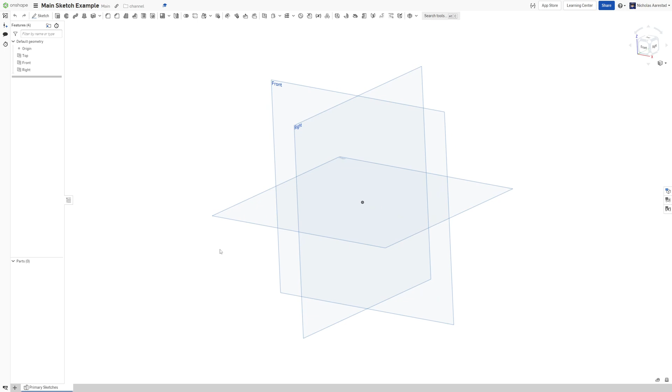So let's start out. You'll notice I'm starting with this document, main sketch example, and we're just going to start with sketches. Nothing too whack about that. We're going to be doing something a little bit careful - you might have seen this in other videos - but what we're going to do is design the entire robot in sketches, then use those sketches to create our various sub-assemblies.

So we're going to start with the side profile, for a very important reason. You kind of end up with two key profiles for a drivetrain - the side and the top. They're both important, but we'll start with the side because that'll define this distance of how far we are off the ground.

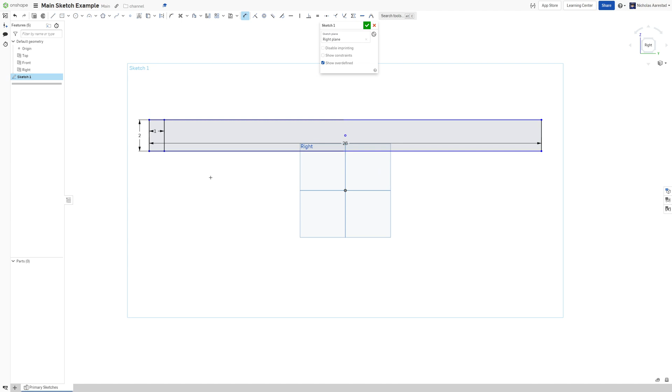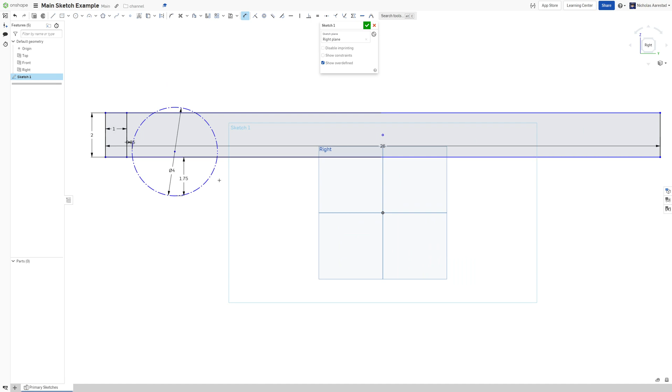This year we're designing using Swerve Drive Specialties modules, and I happen to know that this distance is about 1.75 for these, and then we end up about a quarter inch from the edge. This isn't exactly right, but it's good enough for our purposes here, and it's approximately what will line up with a CAD model for those things.

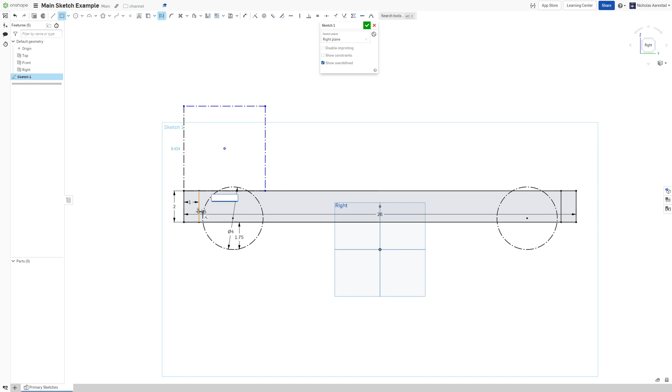So we're going to do a little bit of mirroring here, and then we're going to add just a box up here. This box, well, we'll play with it a little bit - if I remember correctly, it's something like this, but the goal of this is to reserve the space for the swerve modules.

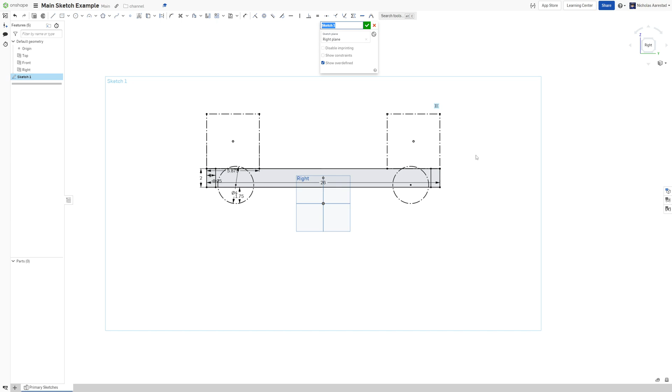I'll leave it like this, just as a reference. We'll go back and change that once we're through there. So we'll name that the drivetrain side, and that's cool.

We have a few other things we're going to want to do here. From there, we'll go and define a plane that's defined by the midplane of this, and that'll let us use this at exactly the level that it needs to be used.

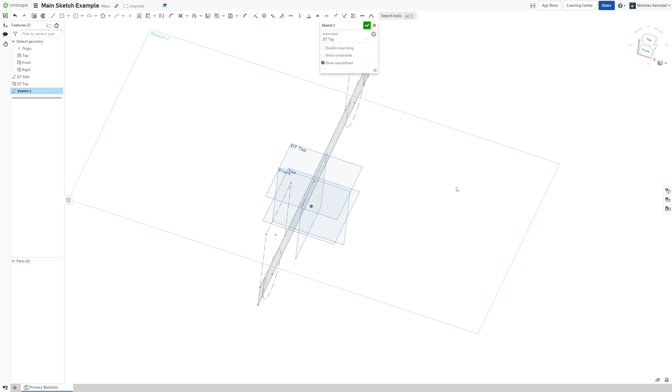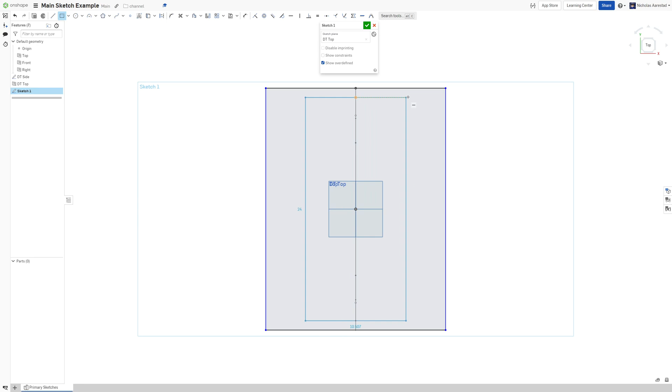And then we're going to use a few tools to make sure that this all lines up. So we're going to want each of those end bits, and then we know that we want to be something like this. Those were already constrained, of course they were. Okay, we're going to be 24 inches wide, and we already defined that it's 26 inches long.

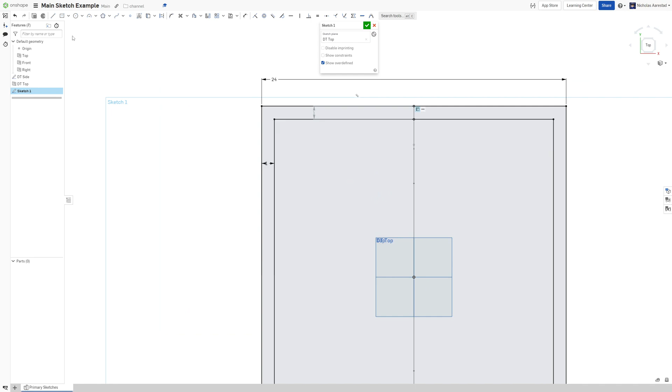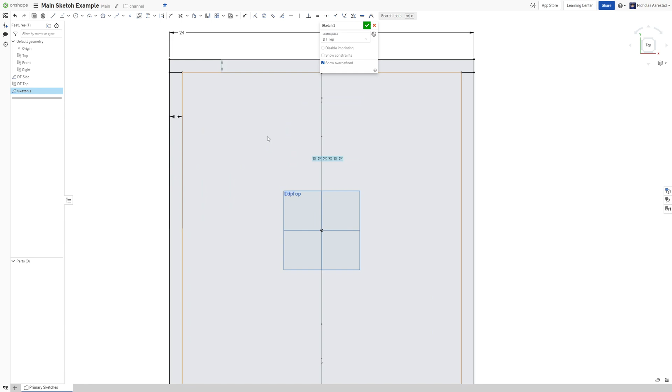One of the bits we'll need to do here is cut these off. You can also do this with just making another rectangle - I like to do it like this just for personal preference. So this is kind of the core.

So that's going to be the drivetrain top, and I'm going to leave this one like this. We're actually going to do another sketch that's basically going to be the drivetrain cross members - these are kind of important. And then it's going to be like 10 inches, which I think these 5 inches there, which is what we want. Cool.

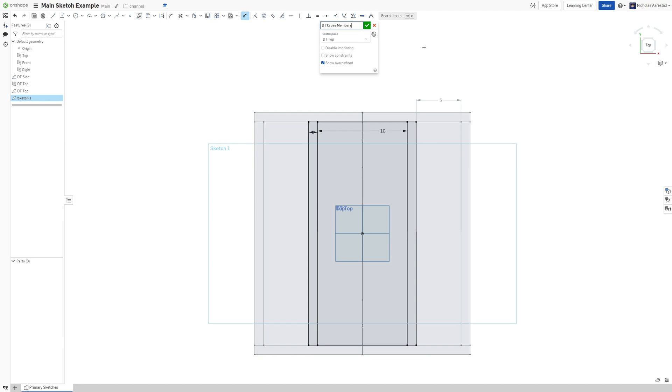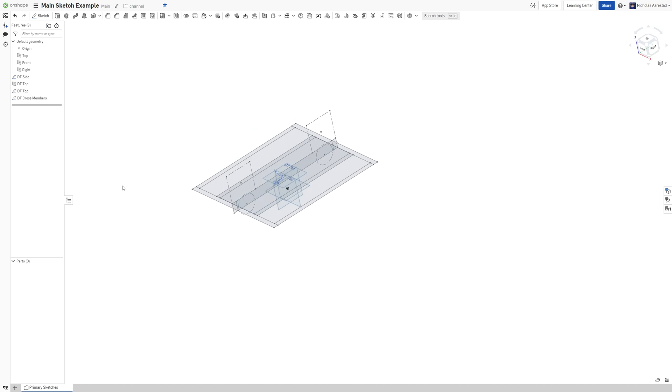So I'm splitting this up into a whole bunch of different sketches for a few reasons. The more granular this is, the easier it is to change one thing without breaking everything else. Also, it's easier to cascade failures, but if you're careful about how you're referencing these things, you can avoid that. So we're going to create a folder - it's going to be Drivetrain - and we'll really quick design that.

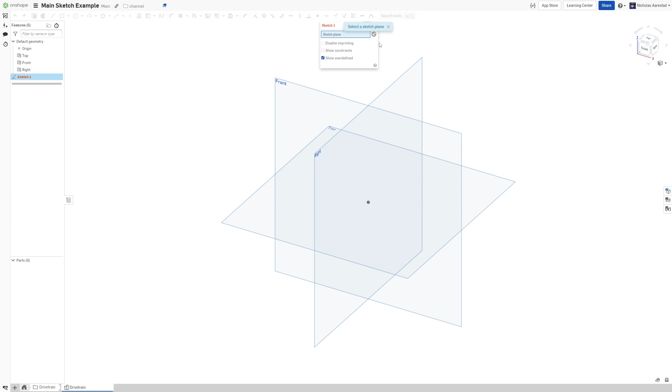All right, so I'm not going to actually go immediately into a sketch. I just did that kind of instinctively, but we're not going to do that. What we're going to do is derive.

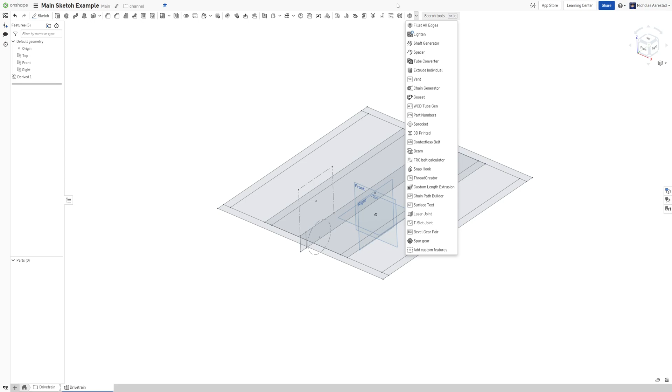All of these sketches. The nice bit about doing it like this is that now we can just extrude individually all of these. If you haven't seen the extrude individual feature script, that's Julia's feature script.

I'll throw it in the link for the video, hopefully you'll find that useful. So this is right. We've got this, this is kind of the body of each of those, which is cool.

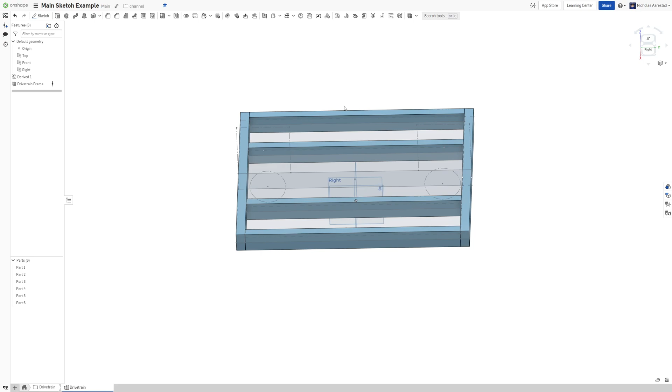We're going to need to do a few things before we go on. One of those is that the way 2220 wires our robot, you'll see this when I pull it in, we have a control board that's in here, and we like to run things through the tubes. So what I'll do is throw in some holes here that can represent those.

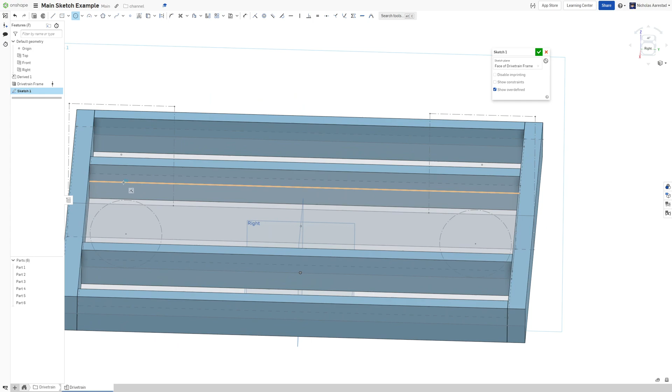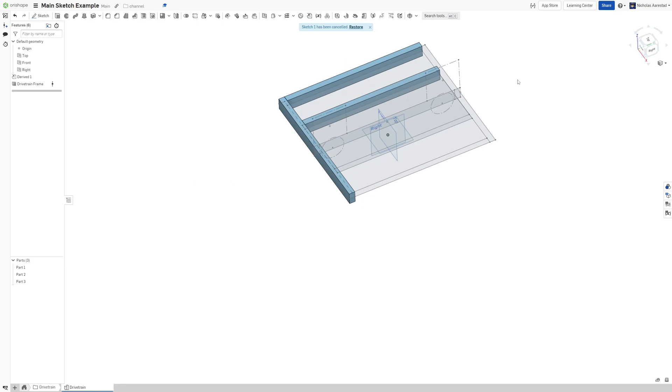These are going to be 1.5-inch holes. Actually, I just realized I messed this up, so instead of doing all of these at once, what we'll do is half of it, and then mirror everything. By doing that, we make it easier for ourselves because we don't have to replicate the features everywhere.

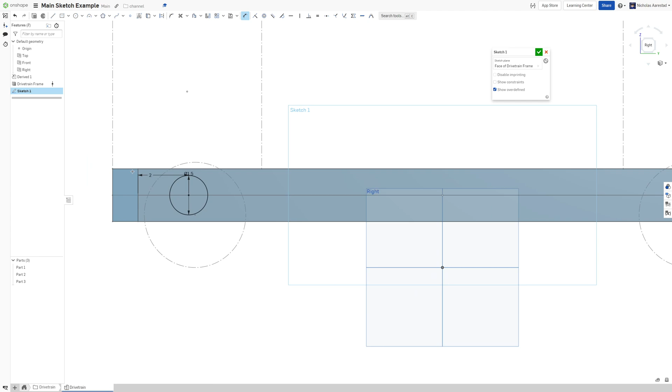We'll get back into that. The exact position of these, since we haven't fixed down a lot of things about the design, isn't super important, though it obviously will matter more later. So I'm going to offset those by about 2 inches. The goal is to leave a little bit of space here for tube plugs that go in there, and those aren't going to be totally unpatterned, but that's all right.

Just take those, and those are going to be half depth, because we're going to have a swerve module right here, so we don't want to wire directly through that. That would be a little bit of a pain.

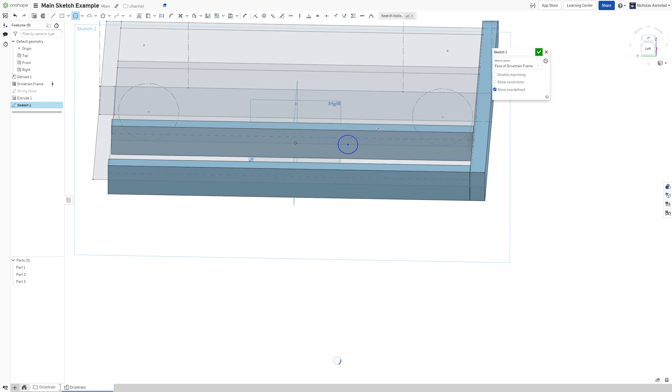So instead of doing that, what we'll do is throw them kind of in the middle-ish. Just put those like 7 inches in. We'll probably come back and visit these later.

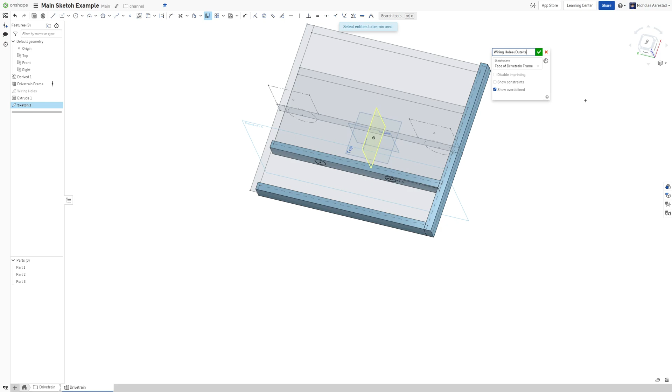All right, half-inch, and they're not going to be all the way through either. So we've got those.

I'm going to go through and name all these features.

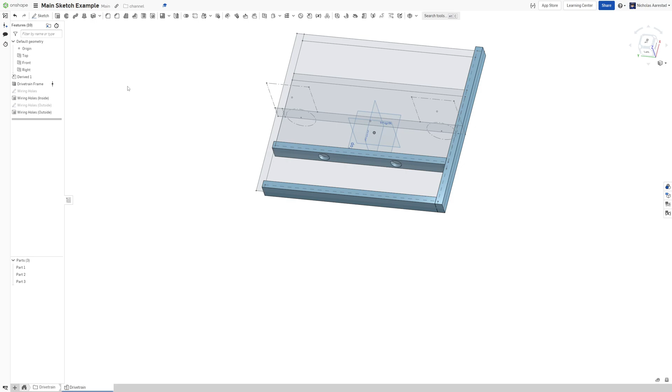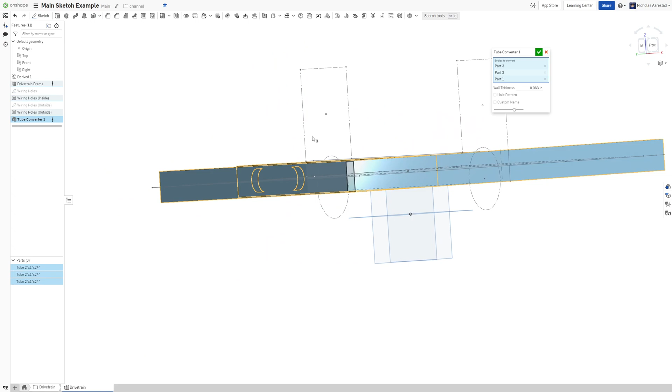And that'll look something like that. I might increase that margin offset because I don't like having holes that close. So you can tell I haven't built this exact part before, because I don't know exactly what the... oh wait a minute, I'm doing the wrong thing, aren't I? This is what we actually wanted. It's the hole margin—margin offset is offset from the end, margin is the margin around the holes. Usually it isn't more than 1/16 of an inch for something that close.

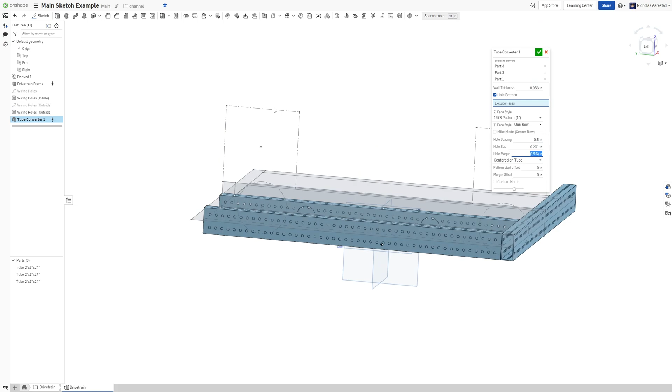There you go, so you can see those holes kind of just disappeared, which is what we want to see. I'll just leave that as a tube converter.

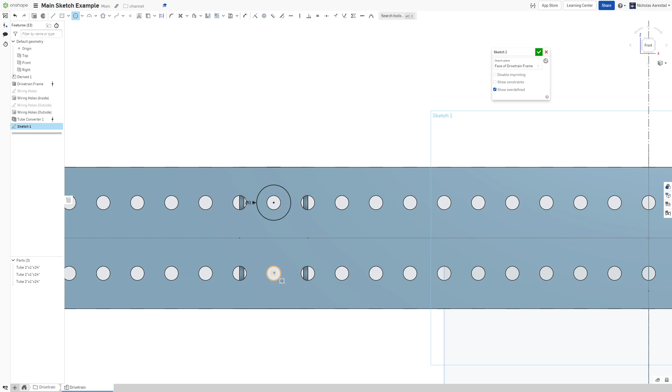We're probably going to have a few other things we want to do here. One of those is we'll want some holes here. We can just make those nice and big. Technically a socket clearance is way less than half an inch, but I just like to make it half an inch, and then it's a little bit easier to get at things. So we've got those.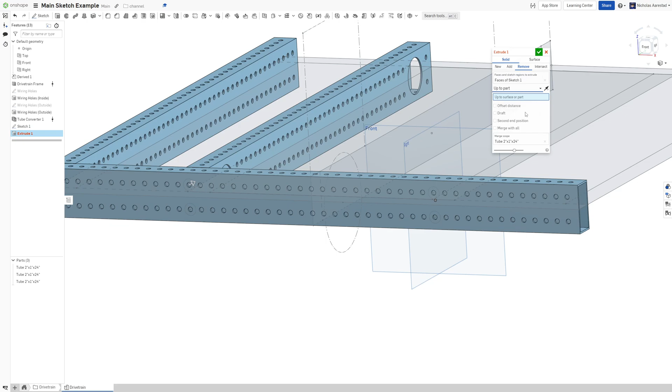Okay, up the face. There you go. Clearance, so it's not clearance holes. There we go.

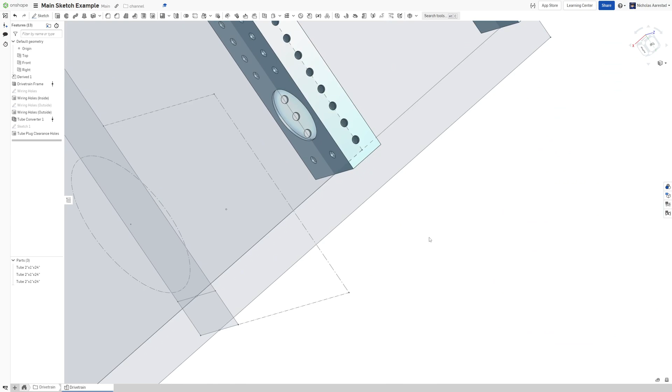All right, so we've got these kind of center rails, and some end rails. I don't have an extra hole in here—you could technically do a middle hole, the West Coast Products tube plugs we used for this do, but we're not going to. So that's kind of the core things with the tubes. We might also add some other clearance holes later, but we won't worry about those right now.

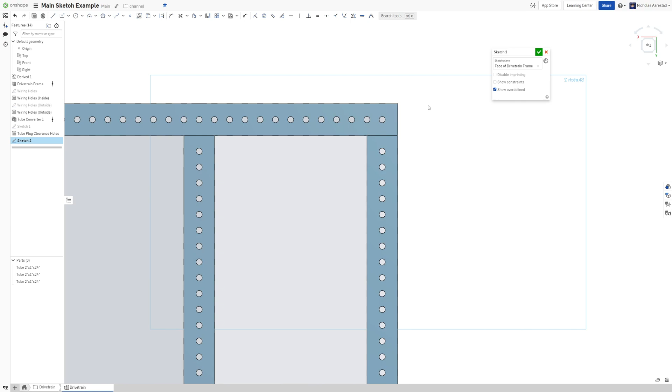So one of the next bits that we want—sorry, I'm flipping around—is going to be like this.

I do them like this because I like to have a little bit of an offset from the edge. Having an offset from the edge kind of saves you from some mistakes that you can end up with.

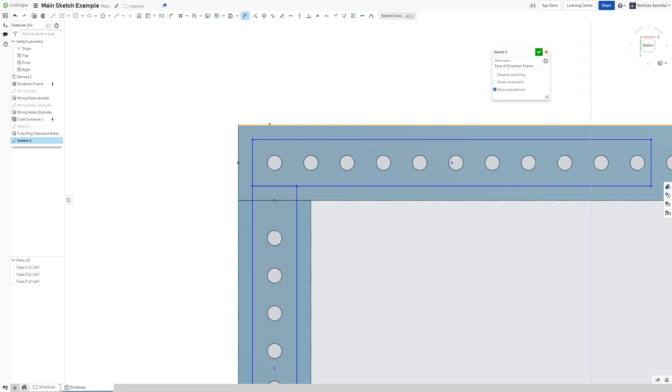If I remember correctly, the swerve drive system modules start their first hole at the fifth one in, so this guy. But that's not 100% relevant right now. So it's the fifth one, and then it's basically every inch. So 1, 2, 3, 4, like that.

So what we'll actually do here is, this can't just be construction. We're just going to use a whole bunch of these to make the initial one, all the ones we think we're going to need.

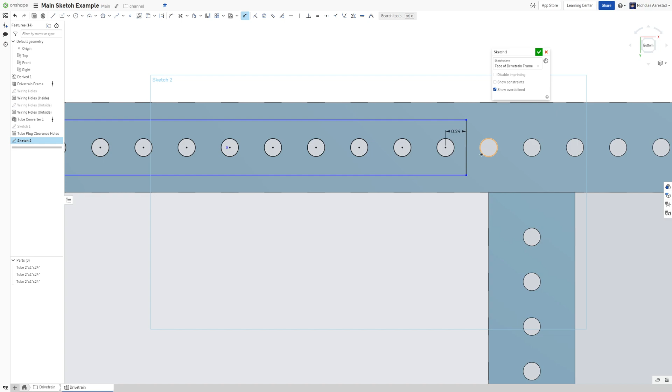I like to go 0.24. That means that if I do 0.24 on each side, I have a nice little itty bitty gap there that makes all the clearances work out. And this will be just a little bit from the edge.

Okay, and we can see that we're kind of doing the same thing down here. You see that we're pretty close to the same. So that one's actually probably the right hole here.

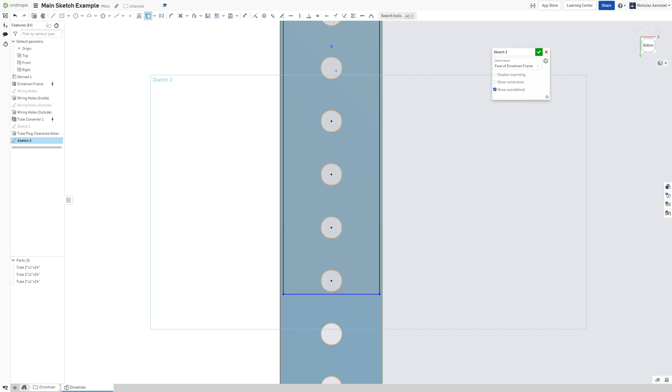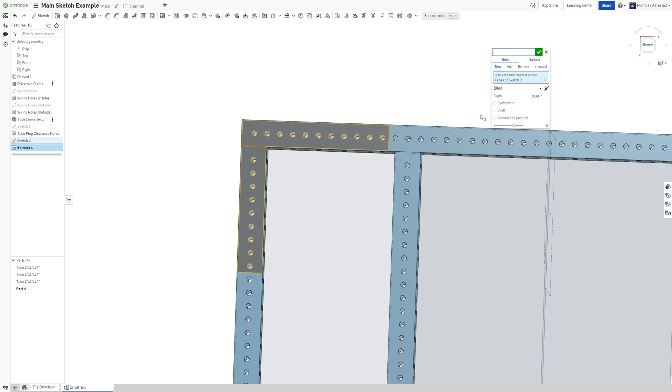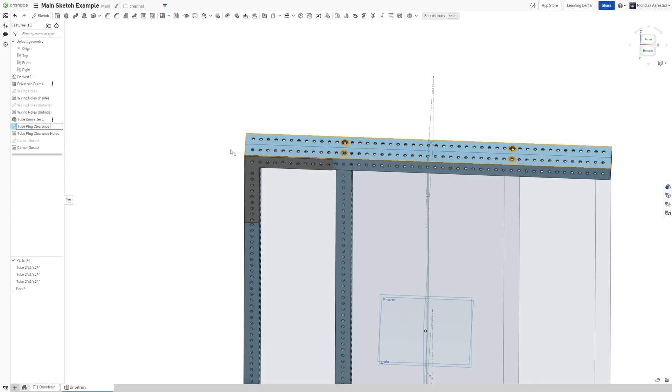We'll rename some of these guys. It's always good to name things as you go. Helps make sure you can view things later, remember what they are. If these were more than like two, and even if this got larger, I would probably group these up into folders just to shrink it down. But they're not, so I'm not going to do that.

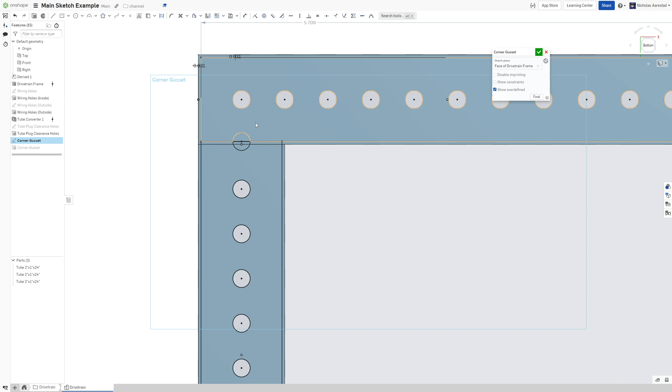I just realized I should probably also have one of these guys right here. The reason for that one is that it makes this symmetric. That will make this a symmetric part, which is very nice. Oh, that was the wrong one.

There we go. All right, so we've got those. So then the big deal is, this could be fine. This would be a fine part if we were going to stick a bolt all the way through it with the 10-32s. But for us, what we actually want to do is use a shorter bolt.

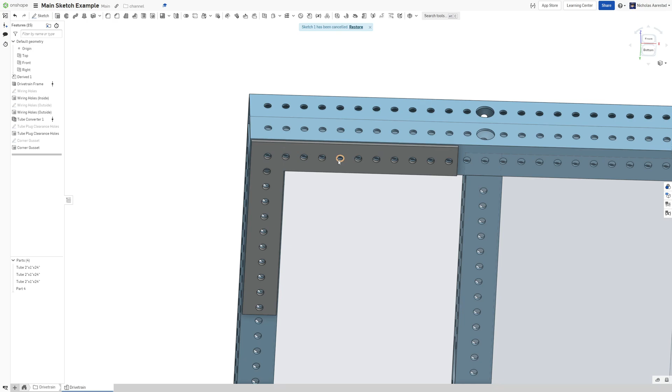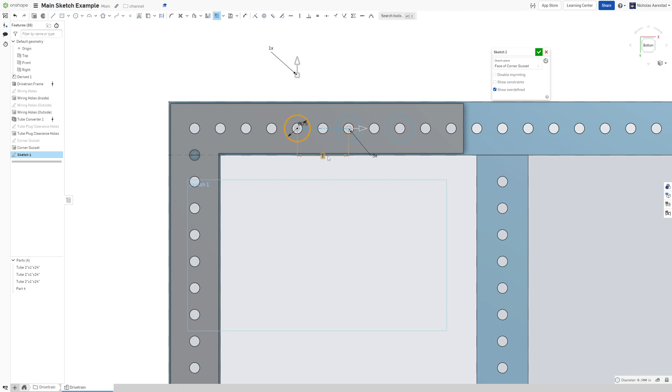So we'll do that. I think it's 1, 2, 3, 4, 5. And this will be a 0.5 inch. And then what I'm going to do is I'm going to do it like this. The reason I'm going to do it like this is because doing it with a pattern like this will make it easier to change if I want to make this a little bit different later.

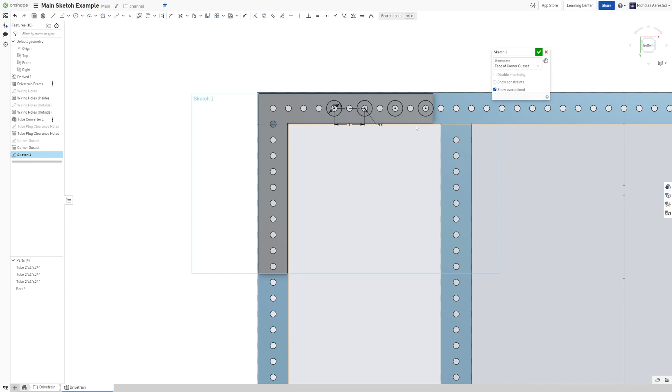You notice this guy kind of hangs off the side. That's not ideal, but we'll live with it. We'd probably want to trim that off, and we probably will. So we got that side, and then the other bit that we'll do here is

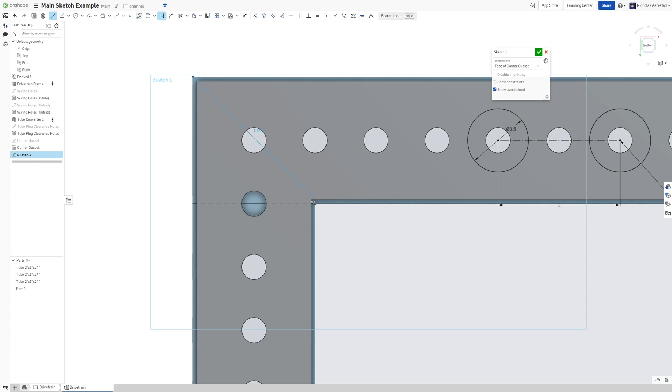we'll create a little line here and use that to mirror across, because these are going to be symmetric across that. And you can see that now we end up with basically the same thing here.

I'm going to go into an extrude, and we're going to remove. We also want to remove from both of these. You'll notice that right now it's just doing this corner. What we'll also do is mirror these across to make sure that they're all good, make sure that we're fine on all sides.

So we're going to go up to that face, and now you can see we've got some nice clearance holes.

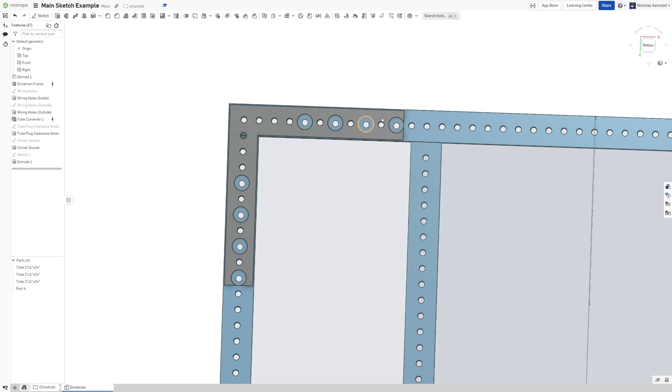Yeah, so our other option is that these don't need to be half an inch. If they were something closer to what's actually recommended, which is like 3/8 of an inch, we end up with that. And in fact, I'm probably going to do that just because that's a little bit nicer.

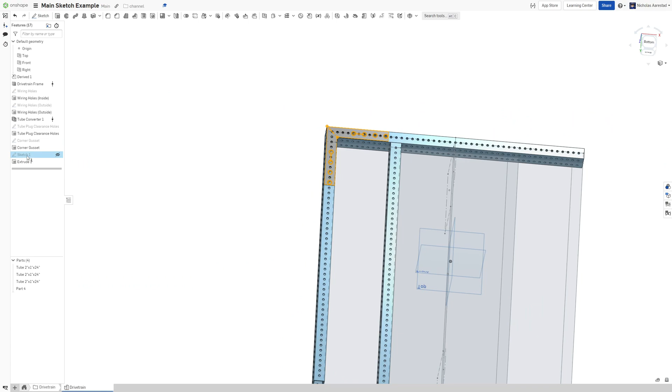And then we're going to do our mirrors. So mirror those across, and you see that now we get those down here.

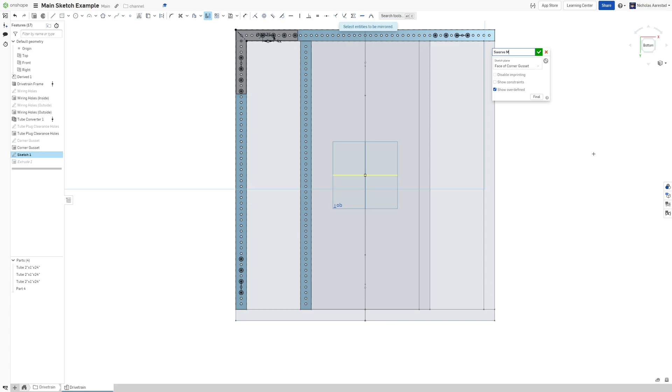Mirror them down here. Then we'll name these clearance.

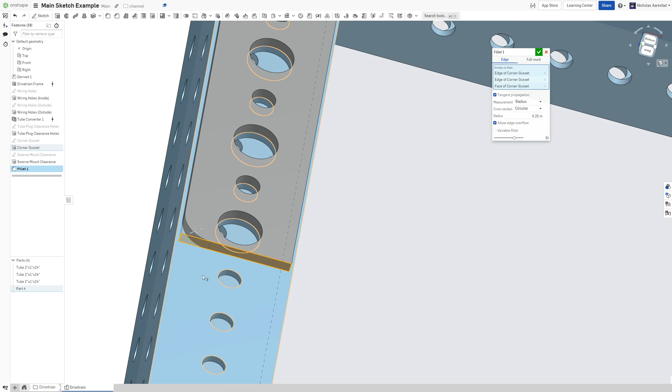Right, and for our final bits, we're just going to round everything off—not the entire corner, that would be bad. I'm just going to do those outside ones because I want to do something a bit larger on this inside, something more like maybe a 1.5 inch, just to give it that little bit of extra strength down there.

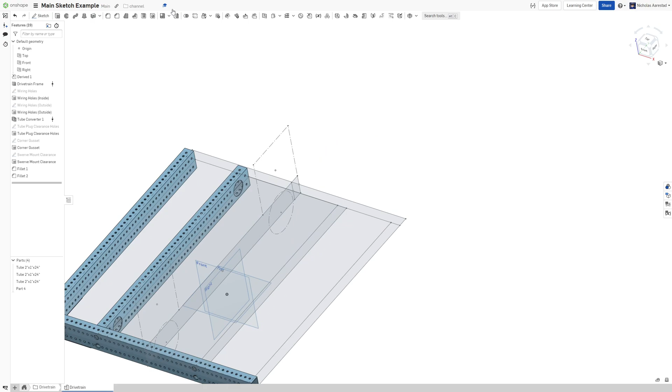All right, so we've got that done, which means all that's really left to do is mirror this around. My philosophy has changed a little bit since the last time we talked, and honestly, I just like mirroring things now. I like not having to do very much assembly at all.

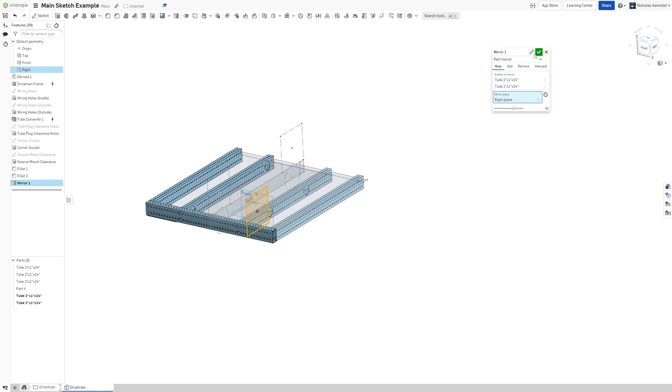So we're going to mirror these across, make sure that they're new, and then we're going to mirror this guy to the back. And now we have all of our different parts. This is the bottom gusset.

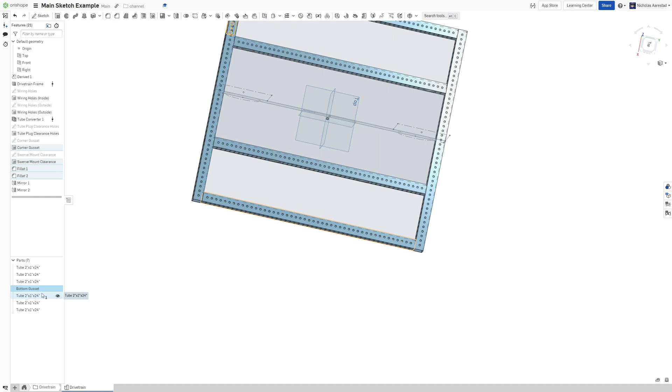All right, so we could technically mirror this guy too, but it's a little bit less painful to just use that one, so I'm not going to. We're going to assemble the drivetrain, and then that'll be it for this video.

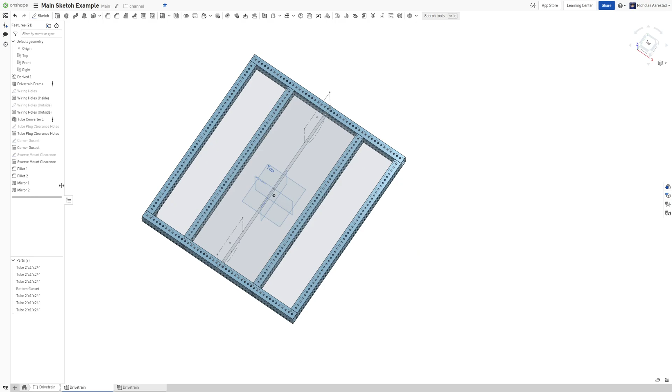All right, so we're just going to insert the whole thing, group it all up, and then fix it. One thing about doing it this way that I'll note is that if I go back to before my mirrors, this guy's going to be broken, so you got to be careful about the state of that when you do this. Splitting it into separate documents can also help with this, but we haven't done that yet. So, all right, we've got all of our gussets, and then we're just going to take this guy and do it a few times.

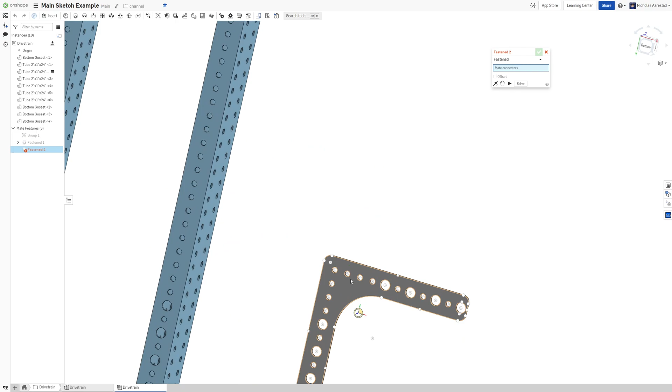And there are different ways you could do this—like I could do this as a radial pattern technically if I made a helper part in the middle. I just don't personally like to do that. If it was something that wasn't just a single gusset, I might do it, but this is a gusset, it's not a big deal.

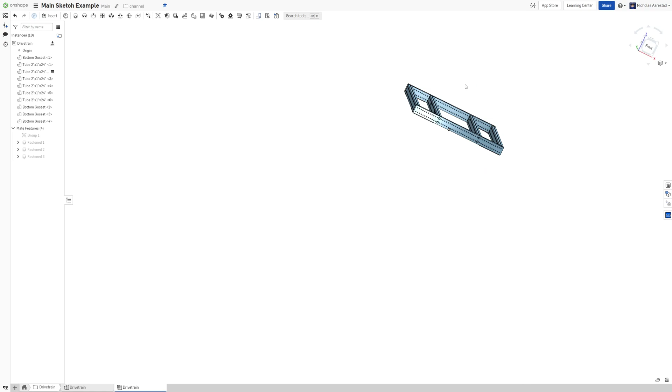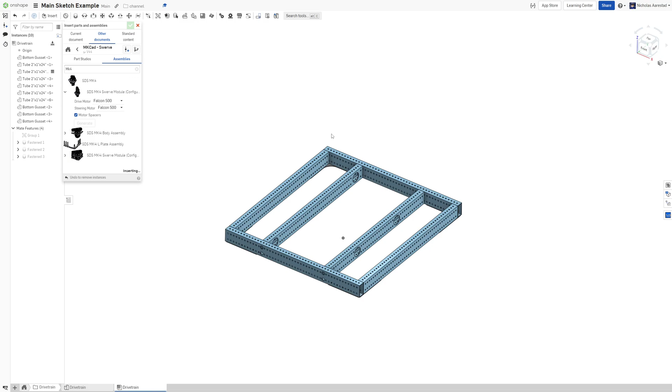All right, so we've got some of our core stuff, and then we're going to go and insert some things from MKCAD. We like swerve drive here, so we like the Mark IV. Now we're going to use this in the same configuration that I used with 2220, which is like this, and we'll see if I got my spacing all right.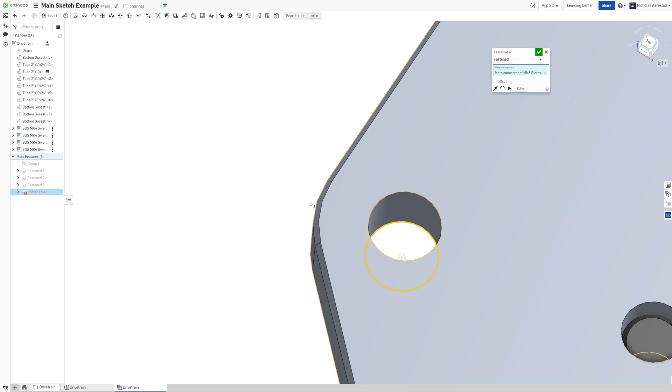Assuming OnShape is entirely cooperative—2, 3, 4, 5... yep, so just like that. 3, 4, 5. 2, 3, 4, 5.

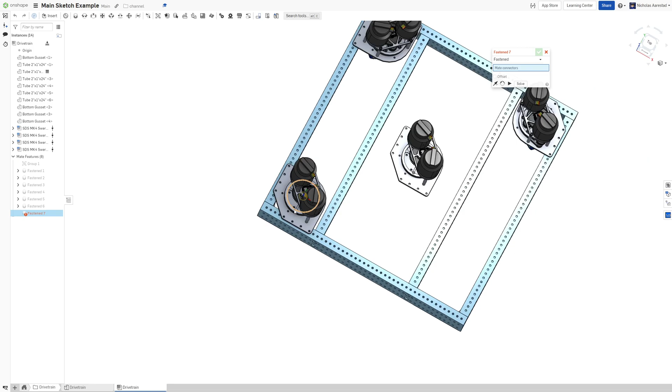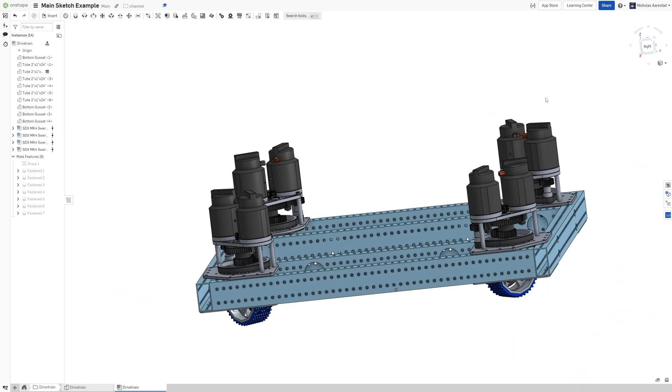So now we've got effectively a drivetrain. It's missing some fasteners, but that's all right, we'll be able to get to that point soon enough. We're also missing the tube plugs, so I'm going to add those, and then we'll call it.

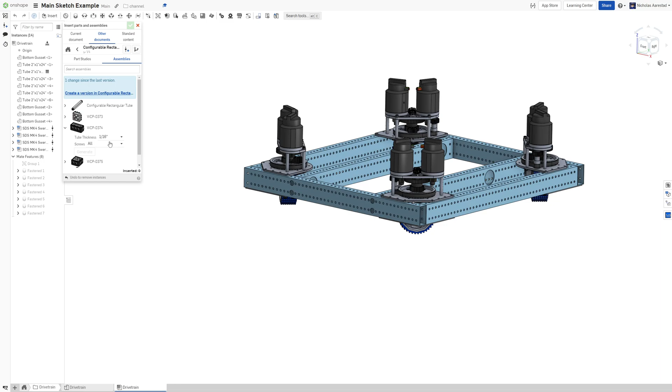So where those live, those are a WCP thing, and these are, I believe, released publicly. If they aren't, I'll make sure that they are by the time this video comes out. Tube thickness is going to be a 1/16 of an inch. So we got one of those.

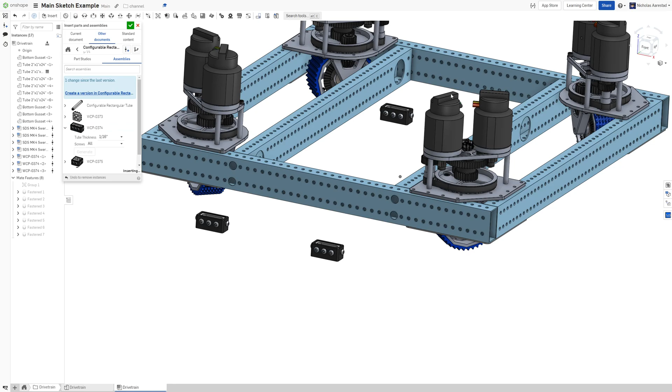2, 3, 4. And then these are just kind of nice—just plug them in there, and then get them to look right.

So those come in with all the fasteners as I've CADed them, but that does not necessarily mean that you use all the fasteners—there's an option to just not have them. I just tend to leave it on so I can see where those would be if we were to have all of them.

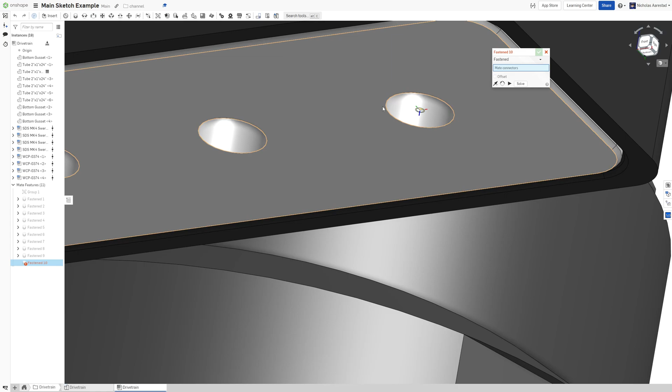Oh, I accidentally selected that. Great. And I just accidentally went too far. There we go.

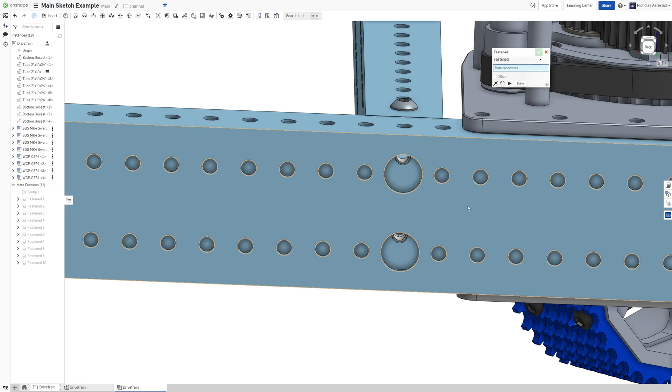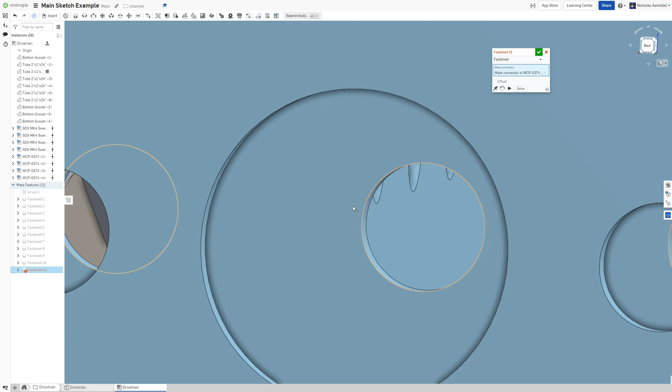Thinking about it for a little bit, and I think I got to do, yeah, two more. Great. I'm just not going to throw in those fasteners right now, we'll leave it at that.

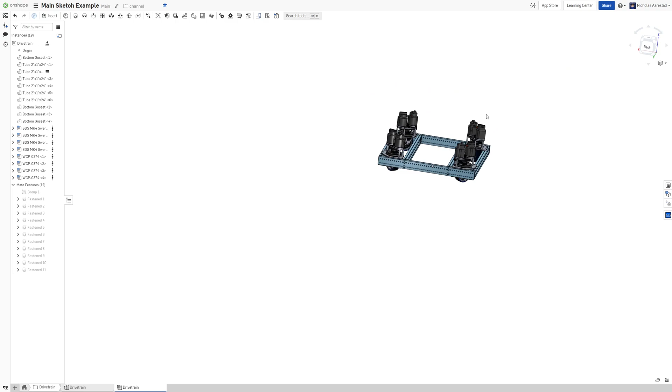So we got that guy, and then we're going to bring it back in to a full robot. One of the things we're also going to do here, while we're at it, is since we're using a constant reference frame, I'm going to add a mate connector.

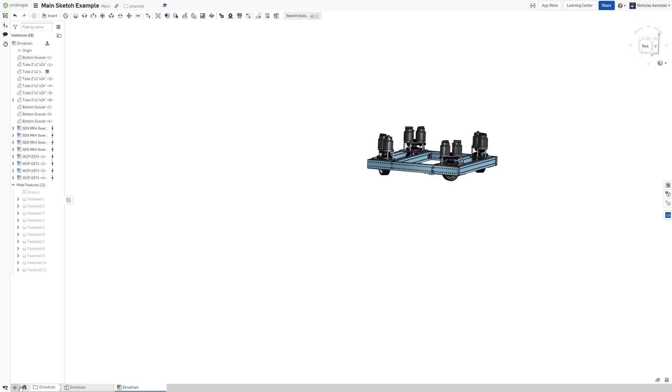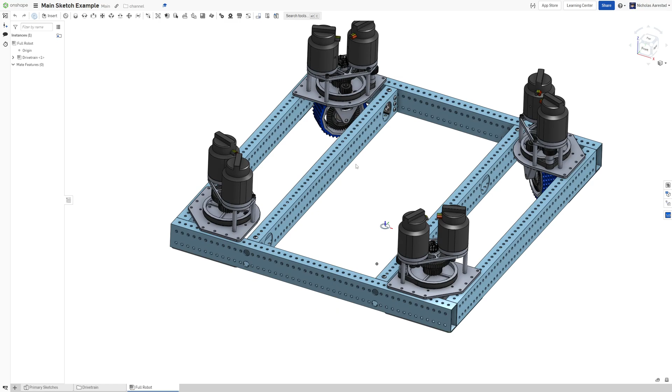It's going to be there, and it's going to be right here. Then when I come in here, you can see that that's visible. And then when I insert this, I will be able, when I get back over to my current document, to throw this guy in, and then just fasten this.

Right there. All right, and that's where we'll leave it for today. So this is the document thumbnail.